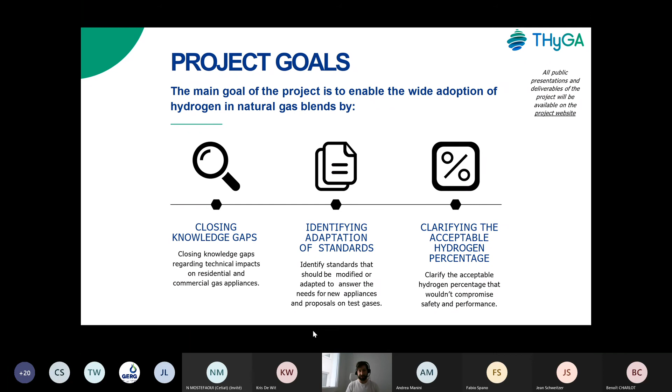So for example, all of you invited today, but also the general public, so that most data is available for the wider public. One important aspect of the THyGA project is that I think 80% of our deliverables are public, so will be available for download on the website. We are really there to help the stakeholders get a better understanding of what may be coming in the next years.

Work package 2 is over, it was done in 2020. It's about the status of gas utilization technologies - what is the state of knowledge today in literature, from past experimentation and past tests in laboratories, and how can we use that to create a test program and prioritize some tests of some appliances. The core of the testing will be done in work package 3, experimental work. Then work package 4 is about standardization and certification, and finally work package 5 is about recommendations for mitigation measures.

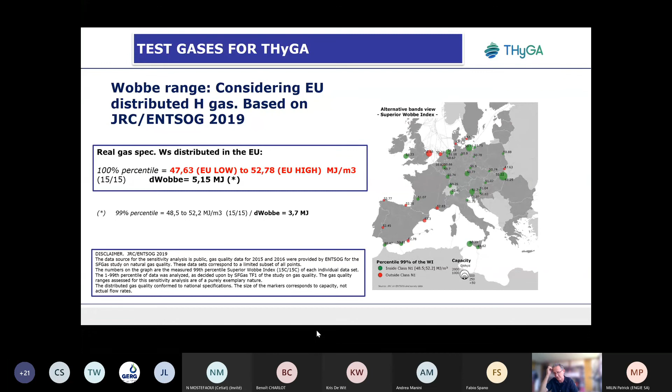So two other gases that we will use as extremes for designer or test gas. Alexander, can you go to the next one?

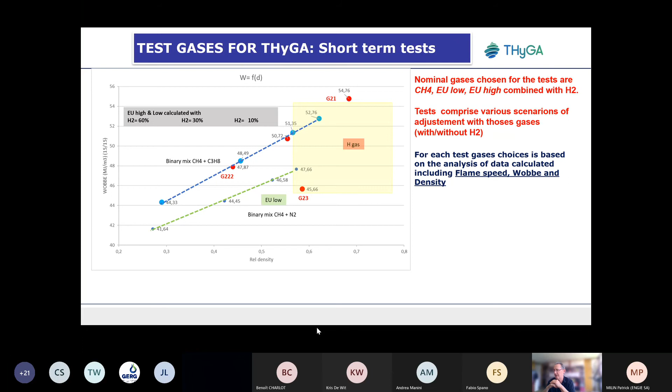Without going into detail, we have a number of tests designed according to the appliance, because for some appliances we can combine safety test, efficiency test and emission test. For others, the test must be separated because the procedure from the standard is different. But as much as possible, we have tried to make a program that brings the best value for the money.

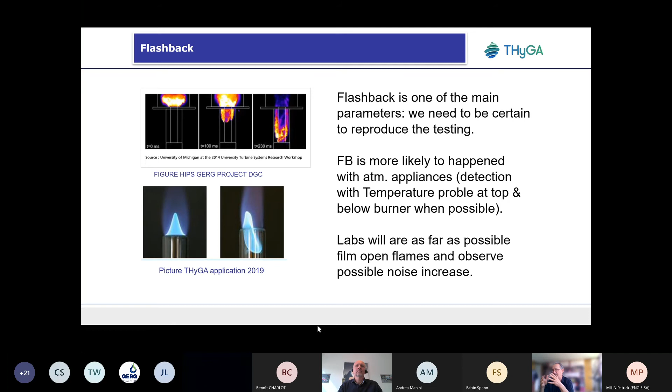Flashback is one of the things expected to happen when you inject hydrogen into natural gas. This is something where we have to harmonize the way we assess flashback, and it's not always easy. We have a lot of discussion about that, but we don't have time to look at the details, so I will go to the next slide.

We designed the testing program according to the highest difficulty for the appliance, to be certain to have the situation where the appliance will have some difficulties with hydrogen. But this will be different depending on the burner type, and this is something we take into account in the testing program.

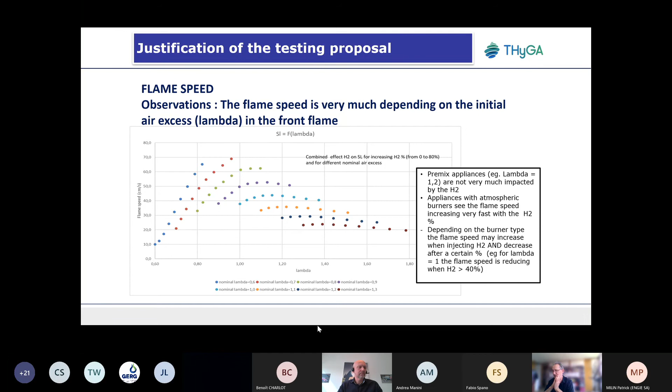One important point, which was also important in a previous project called GasQual that some of you know, is that adjustment gives some additional difficulty for the appliance and can possibly bring some safety issues. So we are testing appliances with different scenarios of adjustment.

Knowing that the appliance's air ratio is fixed with instruction of the manufacturer for O2 or CO2, depending on the manufacturer instruction, and then it is used with another gas, this is somewhere you might have some difficulties. We have tested this, with 4 different scenarios where we adjust with and without hydrogen at low level of Wobbe index and high level of Wobbe index, and then go to the other side. Once it is adjusted, we use the extreme other gases.

In the last slide, we'll have maybe just 1 minute to give you an example of results we have obtained so far. The first example is about a boiler, where we have an adjustment, what we call G here for the test. It is adjusted—one of the most difficult adjustments—because it is adjusted at EU low, the lower Wobbe index, with a scenario of 20% hydrogen. Then, once adjusted, we change the gas without touching anything on the appliance, go to EU high, and then inject hydrogen.

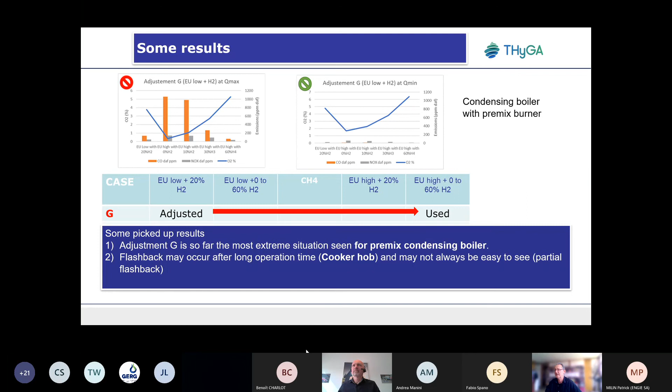I think this is maybe the last slide, if I remember well. Alexandra, maybe you can try the next one to see if, okay, this additional slide, I don't think we should go on that. Okay, thank you very much, Jean. I think those were some long 2 minutes, but I think it was worth it. No problem at all.

And I will speed up for what my presentation now is concerned. Because it is linked, it's a topic we are looking at today, but many of the questions will be addressed in further presentations, or part of the questions I raise. So maybe next slide, Alexandra.

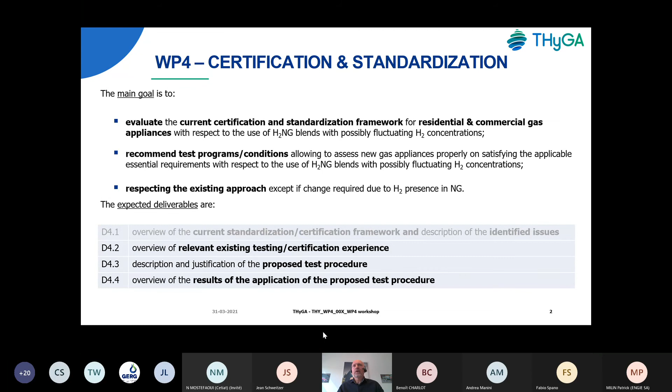Appropriate H2 concentration - to introduce it as soon as possible is also very important, taking into account that appliances are generally there for a long time. And then obviously, besides the GAR, other legislation like eco-design, etc., may also be important.

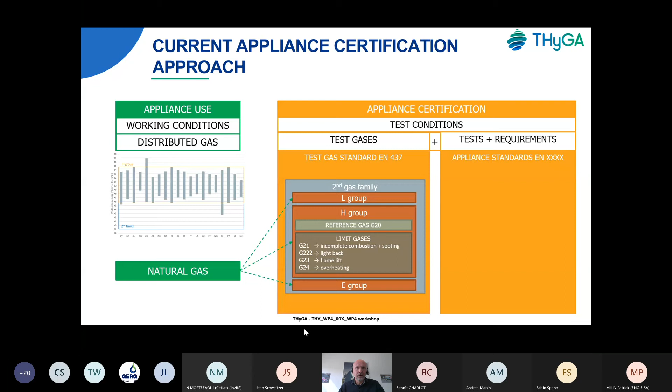There are different gas groups, and we are looking specifically at the H gas group here. There is a reference gas and limit gases that go along with that. Besides that, there are other gases that may be distributed, like LPG, a bit less town gas, but those are the other families of gases. And on the right side, you have the different types of requirements described in the appliance standards.

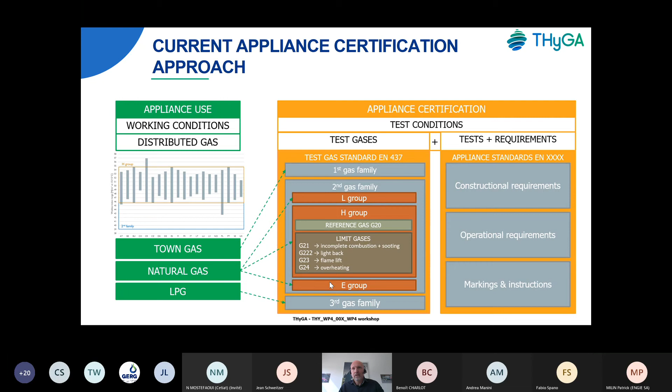Some considerations regarding the test gases - they are defined as set in EN 437. The gas family, as defined today in the standard, is a group of gaseous fuels with similar burning behavior linked together by a range of Wobbe indices.

But you could question that, as hydrogen is significantly different from methane, the main component of natural gas. And looking at the range of Wobbe indices, adding hydrogen in higher concentrations, you could end up with Wobbe indices lower than the lower limit of the current second family.

You have a number of gases in the table below, as defined in the current EN 437 standard - a reference gas, and the question is whether one reference gas is still the right thing, as it's used for most performance tests afterwards. Then you have different limit gases looking at one specific risk generally. There are also questions of whether you would need to change those.

For instance, the one on light back needs to be adapted to the hydrogen concentration we may look at, and maybe taking into account a worst perspective. I wouldn't call it the worst perspective, because the worst perspective is if you look at, for instance, a maximum of 20%, 30% - but is that what the appliance will be supplied with all the time? It could vary over time, and maybe go beyond the maximum value sometimes. The worst perspective would be 100% hydrogen if you end up at concentrations like this, but I think that's not the intention.

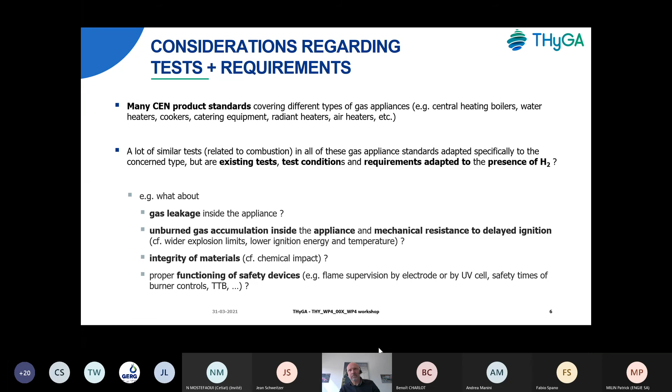So, for instance, we are looking at things that have also been mentioned, like gas leakage, maybe inside the appliance, unburned gas accumulation inside the appliance, mechanical resistance to delayed ignition, integrity of materials, and also - not to be forgotten, very important - the proper functioning of control and, even more, safety devices. It's quite fast, but I think many of those questions are also addressed in the further presentations.

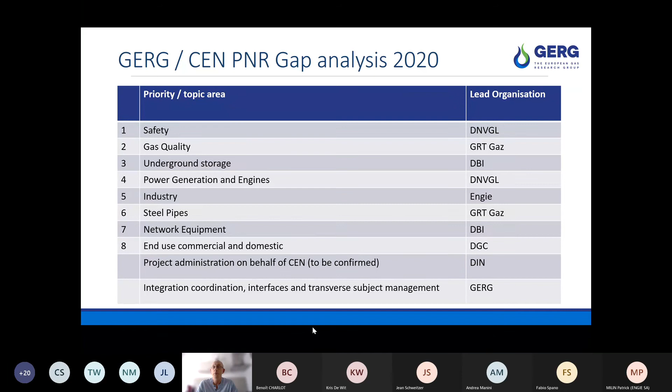In terms of today's meeting, Work Package 8 is the important one, or links most closely to the work in THyGA. We can move on to the next slide, Alexander. Let's just go over these. The timescale really is to complete this work this year.

We're still at the first stage of assessment. We had a major meeting yesterday, which brings us to virtually the end of the first stage of knowledge gathering. We're now moving into the stage of assessing the gaps in knowledge, and ultimately we'll be looking to do recommendations for future pre-normative research.

We would expect this would lead then into a number of research programs, which will lead to an improvement in the roadmap to standardization. Importantly, pre-normative research is about standardization. It's about certification to some extent, but standardization is the basis of this work.

As I say, it's moving very fast, and we are catching up in that the contracts were signed quite late by the Commission compared to the actual timescales, but we're moving very quickly, and we expect to come up with the first assessments within 2 to 3 months.

So having introduced it, hopefully in only about 2 minutes, I will hand back to John, who will tell you about Work Package 8.

Thank you very much. I think there is some echo. Maybe somebody has a mic.

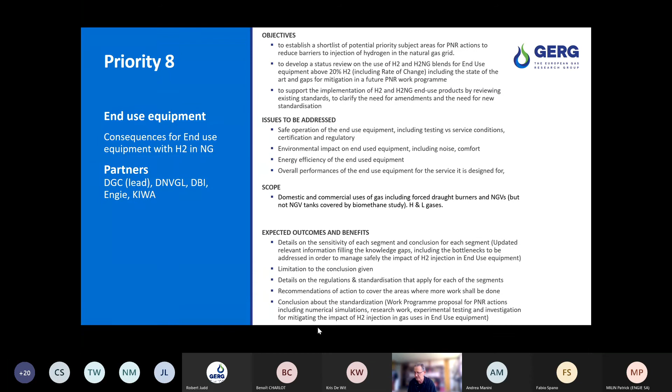Maybe I will go on the next slide, not to use too much time. So what are the activities at the moment? You have to know it's not a big project, so we have quite restricted funds to do the work. We cannot go too far, we have to stick to what we have in the literature and what we know, the expertise we have around the table. We have no room for testing, no room for whatever fancy investigation.

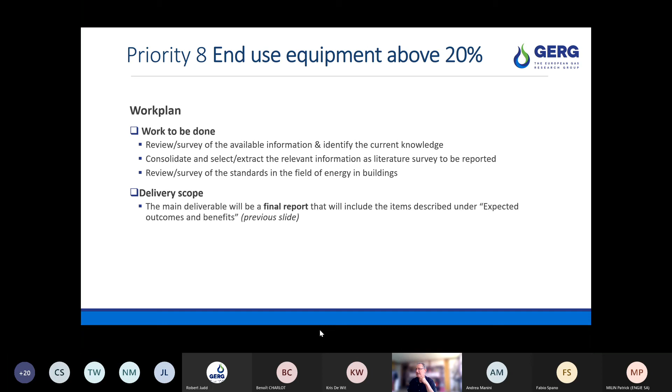So what we are doing at the moment, we have gathered -- this was done by our Robert, Alexandra, and GERG team -- collected something like several hundred, I think it's 900 references at the moment that are dealing with hydrogen. At the moment we have identified something like 240 references that are relevant for the WP8 for the end use. We are now going to work on the references and take the information that we need for the project. So maybe next slide again, Alexandra.

Maybe that's not very interesting, but just to say that we are a few laboratories here -- 6 laboratories or 6 partners that are doing the work, and we have distributed the work among the experts. Where we know they are strong on some areas, they were given, let's say, 2 specific points to work on. And as I mentioned, there is a lot of, I will not say overlap, but there are some common topics between the different priorities. There is also an important element to connect to the other groups that are working on, for example, safety or gas quality, which are things that are very relevant for us as well.

Maybe I will just go on to the next slide. So what we are going to do here is that we are gathering the expertise. We are starting to analyze the different references, and we will use a matrix -- I will show you -- to work and as a tool for putting the information together and analyzing it.

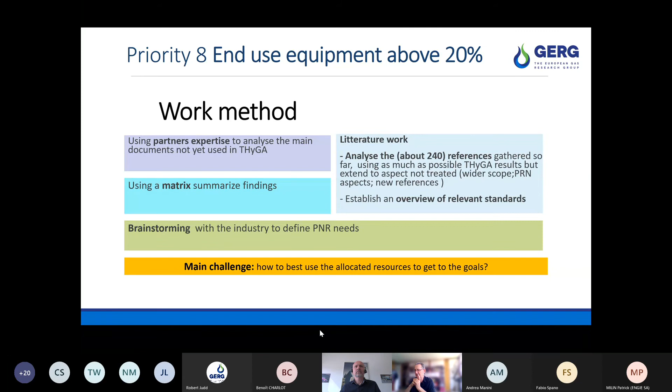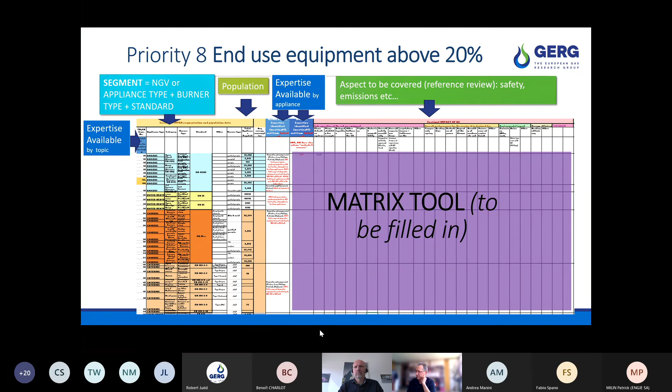Maybe I will just go to the next slide. I can just feel I don't have very much time. So in the different columns, we are looking especially at the impact of hydrogen on safety -- all the points on the table here, from flame detection system, flame stability, and so on. We are also looking at the overall performance for the service for which the appliance is designed, like, for example, the heating time for cookers, which is an important parameter. But we're also looking at environmental impact, from emission to noise and so on.

Let's go to the last slide. Okay, now, sorry, just back on the last slide -- those are so far the appliance standards that are concerned by our WP8, and we have identified yesterday a few more, so the list will be updated.

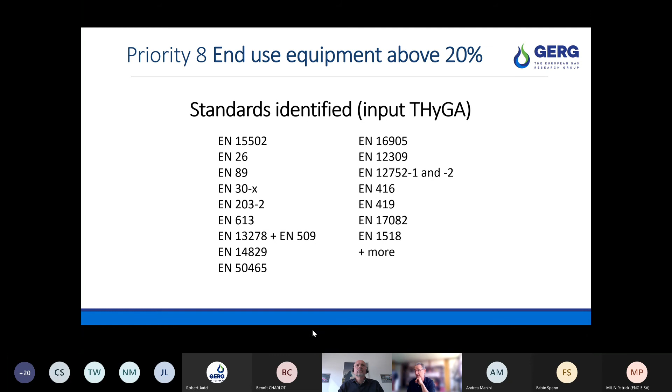I want to use a bit of time on the last slide here. This is what we are going to do next steps. When we have done the analysis with the method of the matrix that has been described shortly here, we are trying to identify what are the learnings about sensitivity to hydrogen for the different segments, and also what are the possible learnings about R&D needs in terms of prenormative research.

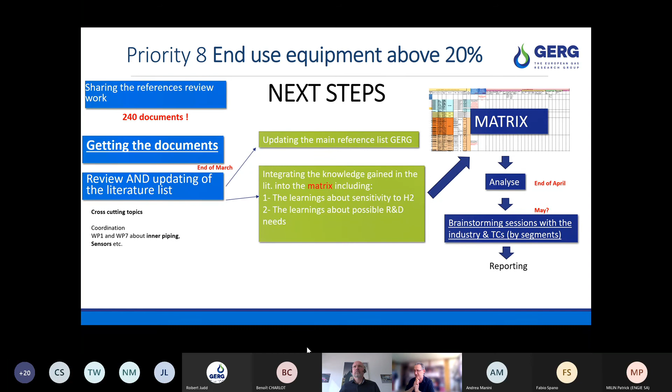And then we would like to make the analysis, and some brainstorming with what we call the industry—basically manufacturers, experts, and TC members. If you are interested to contribute, we'd be glad to hear from you. Hiltrud is gathering interest toward a table where different interests are mentioned, but if there are people outside the CEN group willing to help, we are interested as well. Thank you for your attention, and sorry again for taking too much time.

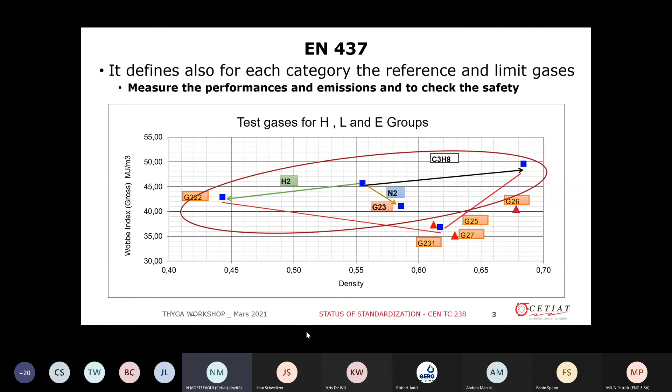This may have already been covered by Chris. The gases used for group H include G20, G21, G222, and G23. We also have another gas, G24, called the overheating limit gas, used by manufacturers—not for certification—to check the impact of high heat or heat fluctuation on the burner. We add propane to increase the heat and hydrogen to increase the flame speed, so the flame is mostly stabilized on the burner surface.

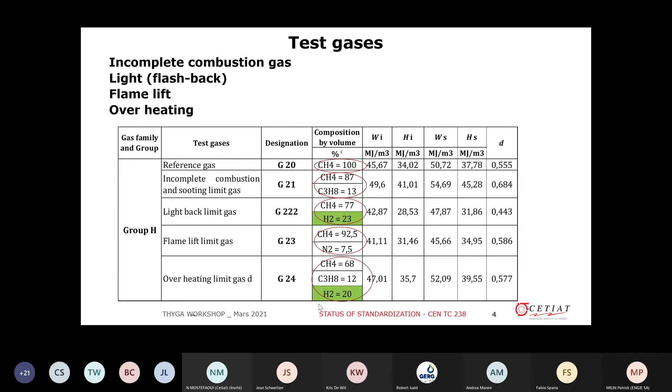This was already shown before, but just to emphasize: for manufactured gases, nitrogen is added to reduce flame speed and also to reduce flashback. Otherwise, if we only have methane and hydrogen without nitrogen, the flame speed will be very high, leading to a large influence on flashback.

Okay, what is the impact of hydrogen? As Jean said, and also Chris, the main problem is the flashback, because when we add hydrogen to the gas, we are going to increase the flame speed, as shown on the diagram presenting flame speed as a function of hydrogen content in the gas from 0 to 50%, for different excess airs or lambda.

Lambda is 1 plus excess air over 100. So for 20% excess air, we have 1.2 for lambda. As Chris also said, the impact of hydrogen is on flame stability, the flashback, because the flame speed will increase relatively compared to the gas without hydrogen. There's also an impact on performance and emissions depending on the quantity of hydrogen added to the gas.

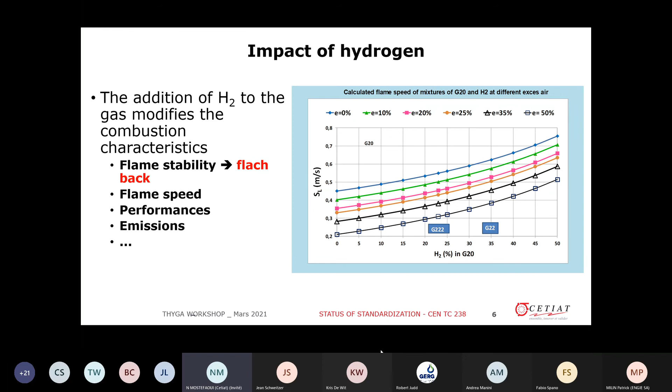So the impact of hydrogen is pushing most of the CEN-TCs to relook at the standards, to see what is the impact of hydrogen on performance and emissions, and adapt the standards accordingly.

So in TC238, we have EN437, which is actually under revision, and the inquiry was passed without big technical comments. The TC decided to publish it without formal vote, and maybe it will be published this year, the beginning of this semester. The TC took a decision in the last plenary in September to revise the standard in 2 steps.

The first step is to integrate into the standard mixtures of natural gas and hydrogen up to 20%. This will start as soon as the standard under publication is officially published, maybe at the beginning of next semester. As soon as the revision with hydrogen is finished, the version which will be published, I call it version 21 because we are going to start the work this year, maybe it will be published in 2022 or 23.

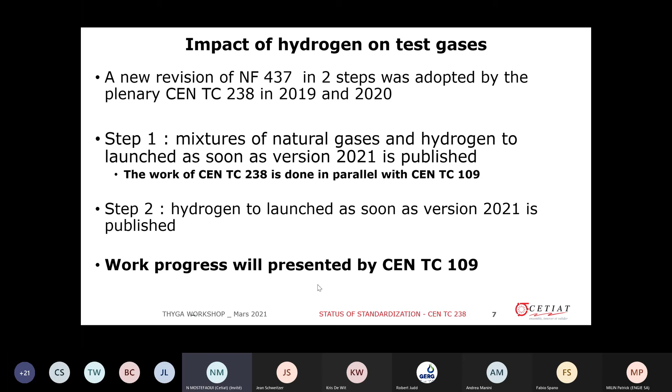We launch the revision for hydrogen to revise the standard. The details of the work done in parallel with CEN-TC 109 will be presented, I think, by Michel and Mindert. I think that's the last one, and I thank you.

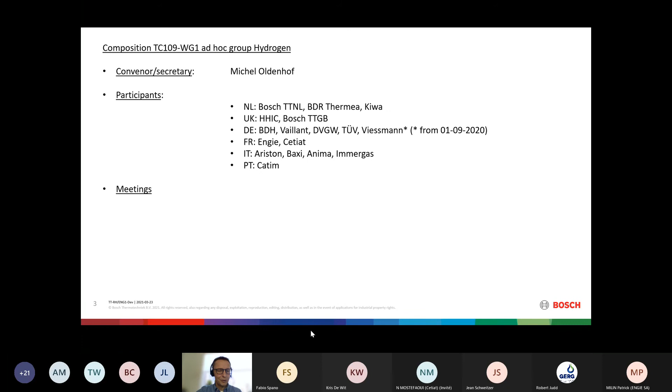We started February last year, and our next meeting—please press the button to see the overview of the meetings we had. Last meeting was in February, the next will be in May. Next to focusing on the job tickets, we also invite people for presentations. Stefan Carpentier frequently gives an update of the THyGA project. We get an update from the UK on HyDeploy, Hy4Heat, and also from Germany on the H2-20 project.

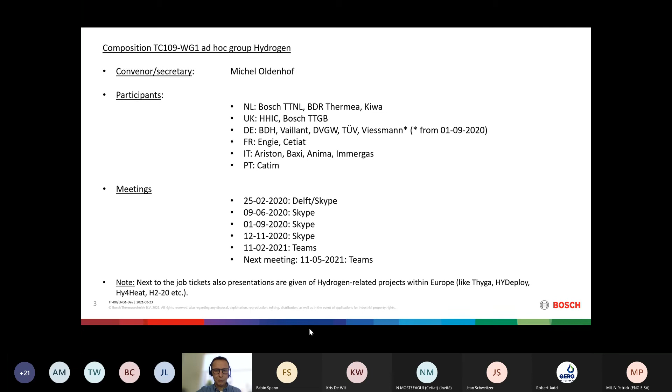So we really want to look also around us what is happening and make sure that we go in the right direction. Next slide, please.

So, achievement after 5 meetings: Job ticket 2 is now nearly finished. We have written a draft amendment for the EN 15502-2-1 for hydrogen natural gas appliances. We will have the final review of this in May, then we have our next meeting, and then the goal is to hand it over to TC109 Working Group 1 for creating a new work item. I hope that can start during the second half of this year.

The second one, as Noordin already talked about, is the proposal for the marking and the limit gases. That is also included in this amendment, and we hope to finish that one also in the next meeting.

In job ticket 3, that is to be started also in the next meeting. Hope we have time for that, otherwise it will be shifted. But we will look then also if that job ticket will be written as an amendment to the EN 15502-2-1 or as a separate part. We already identified by going through the standard that for 100% hydrogen, we definitely need to adapt more in the standard than just 20% blend.

Okay, and then the next slide is, I think, the most interesting one. This was mainly about the process. This slide is showing the adaptations we have done.

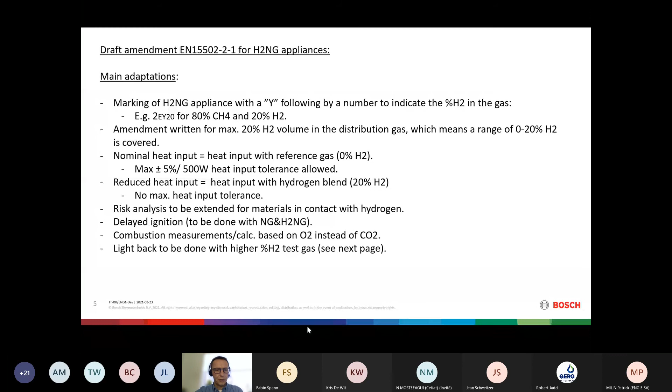And the light back needs to be done with a higher percentage of hydrogen in the test gas. We come to that on the next page. I think most important, and it is already mentioned in the earlier presentations, is the adjustment or maladjustment of the boiler. Because you can just adjust the boiler at 20% hydrogen or at 0, and that makes some difference. It was already explained in previous presentations, so I will not go further in detail, as we have limited time.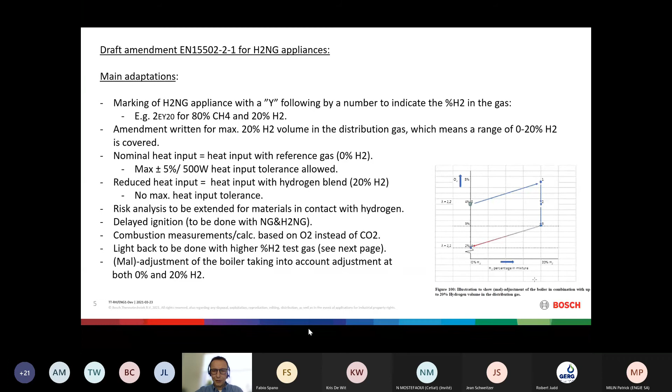Next one is about the limit gases. There I have to make clear that this is still a proposal, not finalized, but basically we have two proposals here. One we call the classic proposal, and it's in line with the current EN 437.

But instead for the light back gas, where we normally have G222, we use the test gas G22. It has 35% hydrogen. So we have the normal gas category, you have 2E, the reference gas is G20, and when you go then to 2EY20, basically all the gases remain the same except for the light back gas, where you have this higher amount of hydrogen.

And then we have the alternative. The alternative is basically in line with the proposal in the PAS 4444 in the UK for 100% hydrogen appliances.

There they propose to use a lambda variation of plus minus 10%, and that plus minus 10% lambda variation we can also use with 20% of hydrogen, or if you have a higher blend for 30% or 40% in the future, this approach can be used as well.

But it's still a proposal, and it's also still under discussion within our own ad hoc group. So there I have to clearly make this statement: it is a proposal, and it is of course still pre-normative work here. So I think this was the last slide.

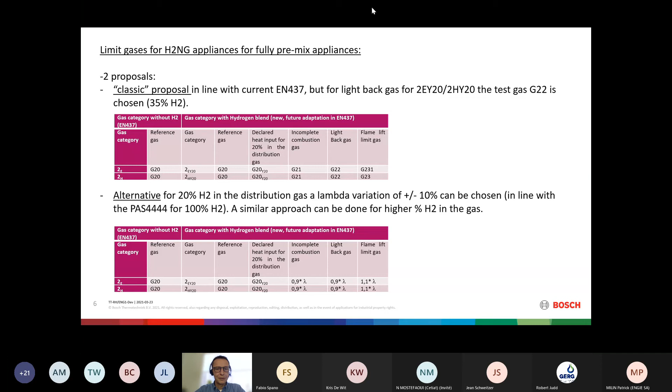Okay, thank you, Michel. That was clear, and I think a lot of work has been done there too. So it's interesting, and probably it goes indeed fast to understand or to follow everything for people that are not directly involved, I guess. But okay, unfortunately, we do not have the time to discuss it in detail.

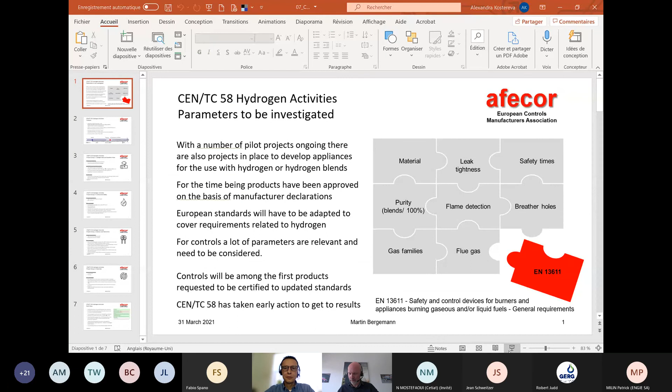Thank you very much. We will go to the last CEN presentation, on CEN TC 58, with Mr. Martin Bergemann chairing this TC. Martin, please. Yes, hello, my name is Martin Bergemann. I work with Siemens in Germany. We produce controls, and I'm also chairman of afecor, the European Controls Manufacturers Association.

I'm a member of TC58, but not chairing it. But we have taken an approach to do pre-normative work for TC58 because the standardization process might be slow, taking 3 years maybe, and we are under pressure since a lot of pilot projects have created a demand for, let's say, controls to be used with hydrogen.

For the gas carrying products, a hydrogen blend is not so much of a problem. It's more a subject of combustion processes. So we are focusing actually on use of 100% hydrogen, which poses different challenges. Some of the topics are listed on this sheet. I will not go into details here. I will more explain how we work and how we want to get to results.

So we are aiming at fast standardization processes. Next slide, please.

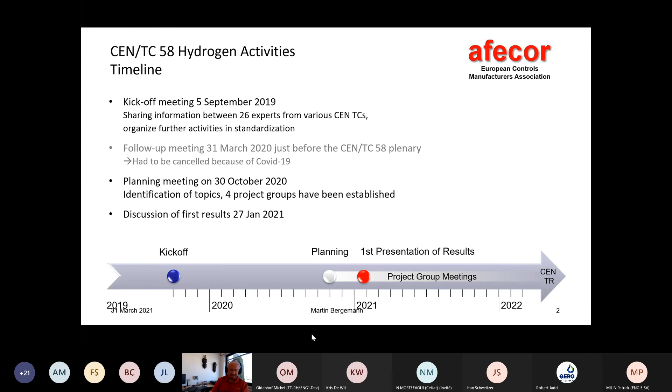Group 1 deals with leakage rate and breather holes. This becomes a topic if you go to 100% hydrogen. We looked at the lower explosion limit as the safety parameter to deal with, and we also looked at the minimum air exchange rate requirements, because if you have a permitted leakage inside a building, you also need to see that the concentration cannot build up—this is in relation to discussing safety.

We have done tests by several manufacturers to check the leakage with pure hydrogen and other gases to compare, and amazingly we found there is no all too significant difference. This indicates that for internal and external leakages, we have more a laminar flow model, and that indicates the limits we have in our standards today might be okay. There's also insignificant temperature dependence.

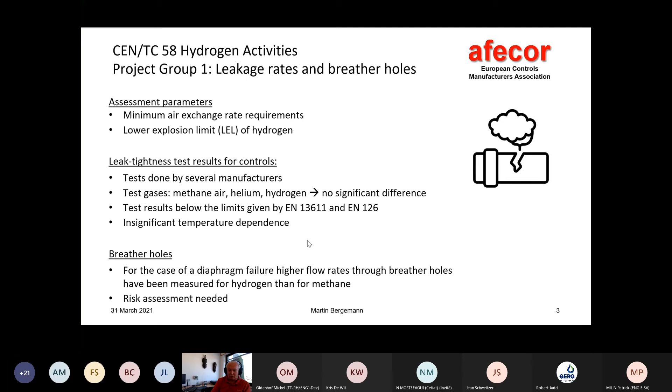Where we have a subject that is more asking for attention is breather holes. If we really assume a diaphragm failure, then the breather holes deliver higher rates of flow, which are significant and need to be addressed. Since here we don't have laminar flow but turbulent flow, with the breather hole diameter the flow increases quickly, and here we need a risk assessment. This will not go without changing requirements. Next slide, please.

Group 2 deals more with combustion safety, and this is actually some cooperation with TC131 forced draft burners. They work on the topic of accumulation of leakage rates. If you have several components in your installation that each deliver permissible leakage rates, you have to look at how it builds up if you have many of them.

Of course, you have the flashback subject and purging procedure. You have to look at products where you sometimes have air inside and sometimes hydrogen. What does that do? Do you get some dangerous mixture in those components, and what do you have to think about that? Then, what do you do if you have to replace certain parts and open up your system, like filter exchange, valve exchange, actuator exchange?

Another subject, more on the combustion side, is if you move towards 100% hydrogen, how do you detect incomplete combustion? Because there's no CO left, you have to find different methods to deal with that. And also there are certain factors compromising product lifetime if you have higher heat exposure.

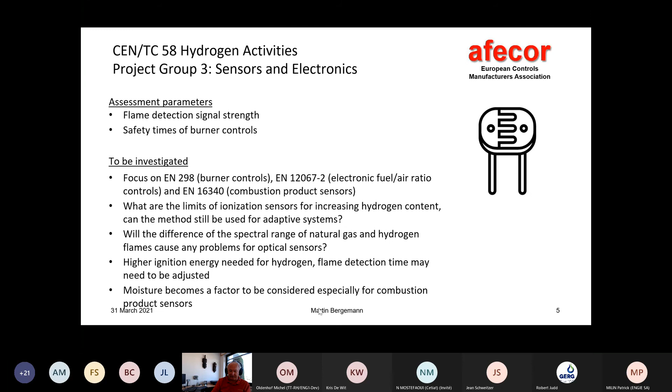The fourth group looks at materials under parameters like temperature and pressure. So far, we see that under the temperatures we use in our applications, temperature does not seem to be a factor. If it does, we would have to add the operating temperature in a certain classification scheme to the standard.

You can have high temperature, you can exclude them for temperatures below 178 degrees, but you may see some H2 embrittlement, and that's something we need to look into with more focus.

And also springs might actually have to be investigated separately to see how they behave, because springs are typically a failure exclusion in our assessments. Next slide, please.

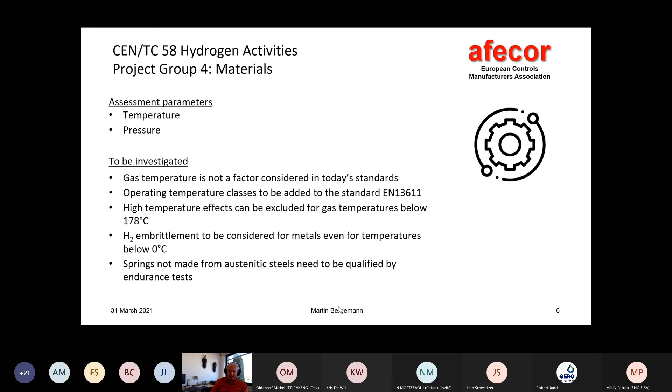So this is already my last slide. How does it go on? We have detailed discussions in the project group. The next one is tomorrow. There's a close sequence of events to really do the work in greater detail.

At the moment we have a draft EN 13611, which is our general safety standard, where already the parts that need to be addressed are marked up so that we can work through them step by step.

We compile all the investigation results that we are getting in a document, which should be made available within a year, because if you work in the standard, it takes longer, and we need this fast. So we have submitted a new work item proposal for a technical report, which should be this document I mentioned. This proposal has been submitted to CEN/TC 58 for decision.

The next plenary is already on April 9th, and we will then decide on that. We may have to establish a new working group for that, for formal reasons for the way CEN is working. And here's the name of the work item proposal.

It's supposed to provide guidance. A technical report is only a guidance document, it is not a standard, but it should provide input for the single working groups within TC 58 on what to do with the individual standards.

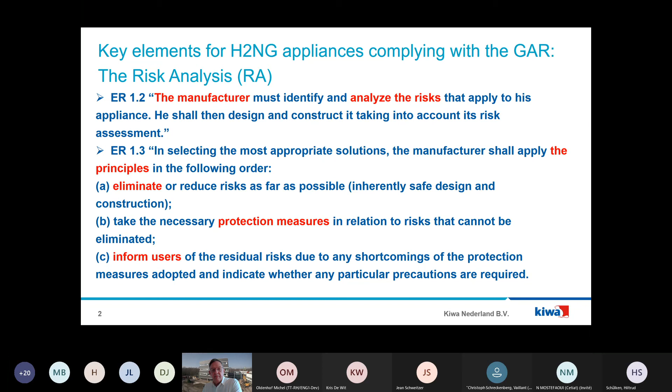Let's go to the next slide please. If you look into the requirements in the gas appliance regulation, I still quote essential requirements because that's the key point. Warning notices on the appliance and packaging, and in the installation instructions, must state the type of gas to be used and the appliance category. This is a legal requirement. As hydrogen to natural gas is not standardized yet, a manufacturer has to improvise. We'll come back to that later, but you have to make clear what gas your appliance is suitable for.

The second step is that you must provide instructions for installation and adjustment. That's the responsibility of the manufacturer, and whatever you write down must be safe. Then we get into more detailed essential requirements: stable ignition and stable combustion process, two ERs. Key issues there are light back, overheating, and incomplete combustion. And one must consider the instructions for adjustment when making assessment here, because adjusting is a key point and a key risk.

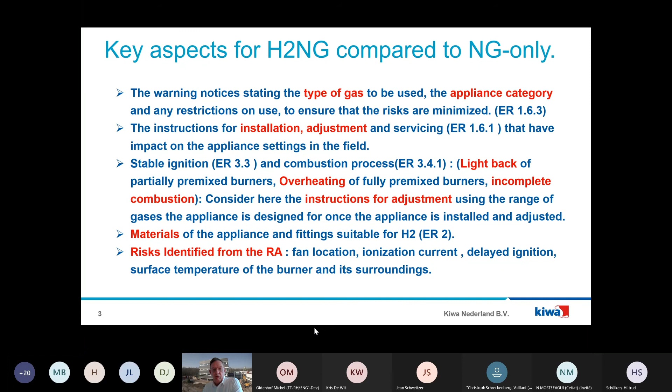Fourthly, to be honest, you have to look at the materials - they must be suitable for hydrogen. Others talked about it. And finally, there are some risks already identified by manufacturers who already have a certificate on their gas appliance: location of the fan, ionization current, delayed ignition, and surface temperatures of the burner and its surroundings. Those are key issues that we have to consider. Can we go to the next slide please?

For the type of gas, we have a problem because there are no standards yet. What was suggested to TC238 but not accepted, or not in the standard in the near future, is to at least make clear for what wobbe range the appliance is suitable and for what amount of hydrogen concentration the appliance is suitable. What we suggest as a notified body is to use two parameters, a Y and a Z.

Let's first go to the Y and then to the Z. The Y indicates the amount of hydrogen that can be added to the natural gas, the base natural gas. A Y20 would mean that you have 20% of hydrogen, and a Y30 you can calculate - that would mean that you have added 30%, and Y10 of course 10%.

The second thing is the Wobbe index variation of the base gas, the real natural gas, because natural gas does not contain any hydrogen - that would be unnatural. But if you add hydrogen to natural gas, the base Wobbe variation is a key issue because that will be relevant in the adjustment procedure of the appliance. What is suggested is to use Z, and the variation in megajoules per cubic meter multiplied by 10. So Z20 basically means a wobbe bandwidth of 2.0 megajoule per cubic meter at 1515.

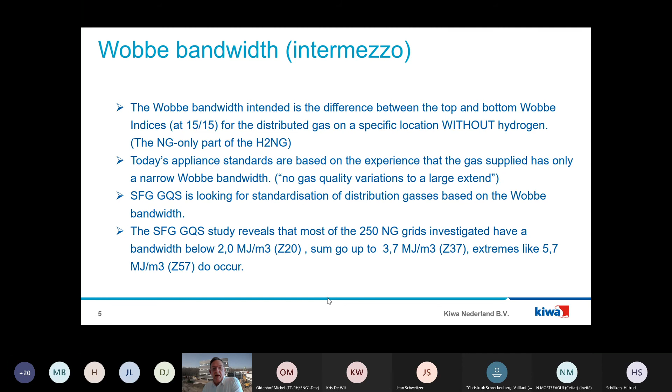Let's go to the next slide. So basically, these parameters could be used in the appliance category. We nowadays have the I2E that could become I2E YYZZ. If you add 20% of hydrogen and you have a bandwidth of 2 megajoule, it will be Y20 Z20. If you have a bandwidth of 3.7 megajoule, it will become Z37.

You can do the same thing for H-gas. And if your appliance is designed only for minor changes - I won't define what minor is - then you can leave out the Z, and then you get I2EY20 for 20%, I2EY30 for 30%. This indicates that you are only designed for a narrow range, and the narrow range is not specified. I tried to get TC109 to agree that the narrow range should be specified at 2.0 megajoule per cubic meter, but they're not jumping the fence yet. Let me say it like that.

The second thing you could do is use the Y to identify limit gases if they're used, like Michel already did. Can we go to the next slide?

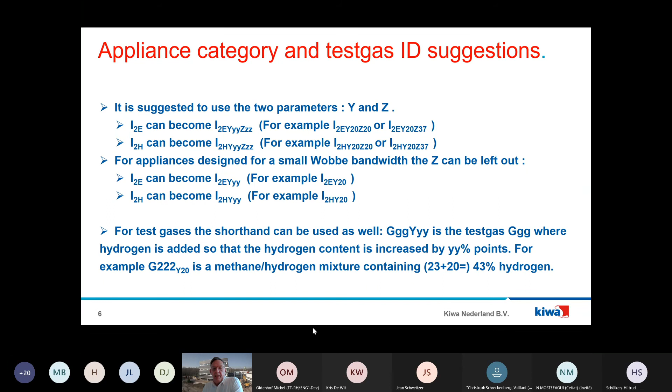Michel already mentioned that if you adjust appliances, you should adjust using the O2 content, and you have to consider whether the appliance is likely to be adjusted. There are a few reasons why they may be adjusted even if the installation instructions prohibit it, like in Belgium - national requirements on CO emissions, national requirements on flue losses - and people may be forced to choose to adjust the appliance or throw it away, and usually money prevails and they say, well, adjust it, that's okay. So we have to consider that as a manufacturer, how likely will it be that it will be adjusted?

A point I have to make is that adjustment instructions could be improved if the actual information on the Wobbe index of the base natural gas and the hydrogen component were available on a city-by-city basis for installers. This is not the case today, but if it were, proper adjustment could be made on site, avoiding improper adjustment. Let's go to the next slide.

And now we go to what adjustment means in the field. Basically what we're saying is, if you have to do adjustment on the appliance in the field, you have at least two extreme situations - let me say a high wobbe day or a low wobbe day with a lot of hydrogen. And on both days, adjustment could be made. So the test protocol must make sure that both settings will result in a safe appliance.

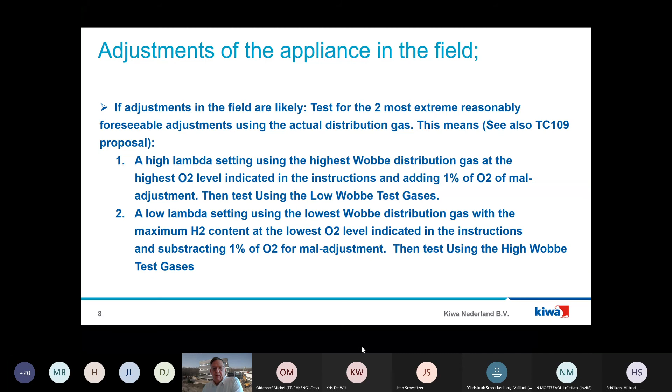Even if you set it at the high wobbe index, then you must test at a low wobbe index to make sure that it remains safe. And if you set it at a low wobbe index, you must test at a high wobbe index to make sure that it remains safe. So that's what has to be done by the appliance manufacturer. Let's go to the next slide, please.

One discussion we were having is, what safety margin do you need for the assessment? Basically what we have today is limit gases for natural gas, which does not contain any hydrogen. The safety margin accounts for risk of wear and tear, variations in climate conditions, and even some maladjustments. So for the appliance manufacturer who wants a certificate, he either has to provide evidence that his appliance has a similar safety margin, or he can provide evidence that the safety margin provided by the current test gases is over the top. If he can provide that evidence, we no longer need those test gases because they're above and beyond legal requirements, and they can be skipped. That would be a bit like opening Pandora's box, but it's a possibility the manufacturer has. If he doesn't want to do that, he has to make sure he has the safety margin.

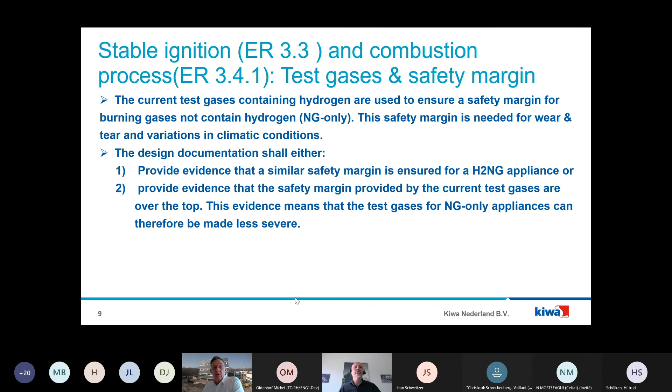Let's go to the next slide. Assuming you want to maintain the safety margin, using the letters I defined before, if you want to add 20% hydrogen to an appliance with limited variation in the Wobbe index, you could use G20Y20 as the second reference gas, and G222Y20 and G24Y20 as the additional lightback gas and additional overheating gas. That will give you the impression that you have more or less the safety margin.

If you want to go all the way and say, my appliance is able to deal with a Wobbe variation of the base gas without hydrogen of 5.7 megajoule, and on top of that add 20% hydrogen, you will have to make an assessment of how to test that. It's my belief this assessment will very much depend on the instructions with the appliance, the mixing method used, and the burning technology used. So it will be difficult to make a general purpose assessment there.

Go to the next slide please. Risks we identified in the risk analysis - we'll go quickly through them. The location of the fan, especially if the fan is in the gas-air mixture: the question is, what happens if it ignites? Will it fly 20 yards or will it only do a big poof? If you as a manufacturer have ensured that people are unlikely to be killed by it, then you have at least eliminated the risk. Flame supervision device, you mentioned it. Delayed ignition test - we would recommend doing a delayed ignition test anyway, regardless of the safety times, just to make sure there is no risk.

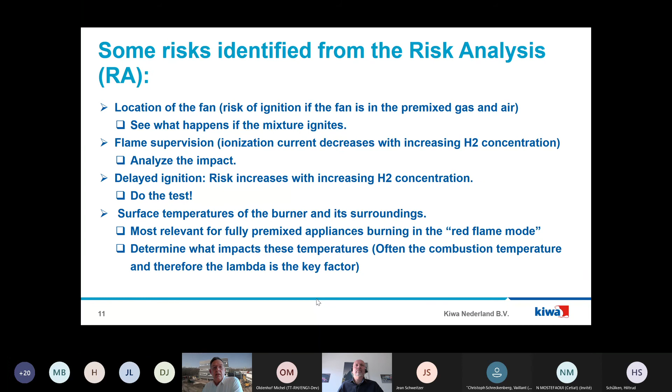Let's go to the next slide. That will be my first conclusion. To summarize it all up: instructions must be clear on the gases the appliance is designed for, and we have Y and Z as an option, but you can do it another way - there's no standard yet. Manufacturers must provide a risk assessment, and evidence that it's just as safe as a normal natural gas appliance. Key elements are as I mentioned, and I underline one because it's key: on-site adjustment of the appliance is not to be overlooked.

And now I go to lobbying mode. If you go to the really last slide...

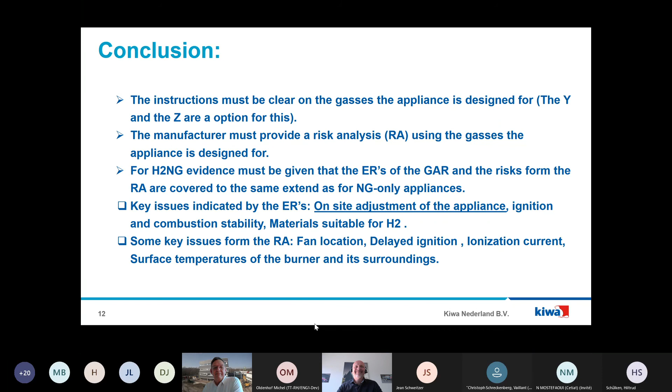What would help? If we want to introduce hydrogen to natural gas, it would be very helpful if there's accurate, actual information on the Wobbe index of the natural-gas-only gas and the amount of hydrogen in the gas, on a city by city basis, open to installers, so they can use that for setting the appliance. This is clearly not the case today, but if that is in place, it will be helpful. This may require national legislation on DSOs and TSOs to be adjusted to make sure they are responsible for doing so. But if that legislation is in place, the manufacturer may assume this information is available and can instruct the installer to use it when adjusting the appliance. So that would conclude my presentation.

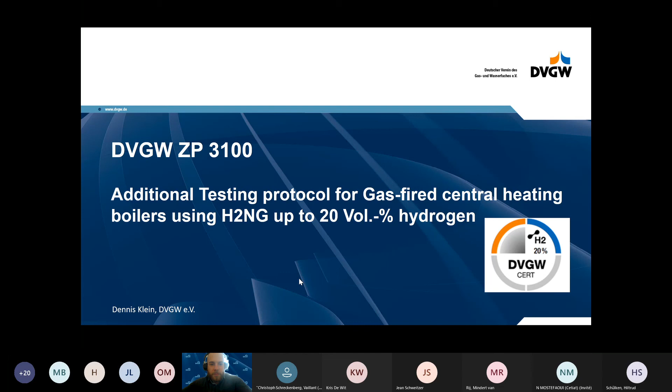And our sister or daughter company worked on a certification program. Please go slide back. Yes, that's called ZP 3100, and it's an additional testing protocol for gas-fired central heating boilers using hydrogen mixtures up to 20% hydrogen. Next slide.

Let's dive in. So first of all, why did we develop such a protocol? There was an increasing demand from manufacturers for the possibility to certify their appliances for the usage of 20% hydrogen mixture in natural gas. And there was no standard available. We're working on it, but in the meantime, there must be a solution to use these appliances.

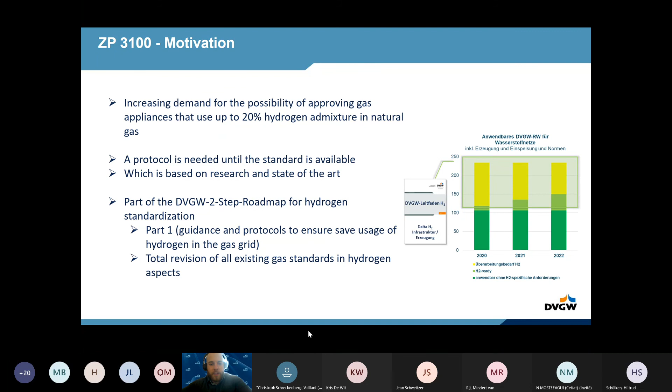Our protocol is based on research in the state of the art and is a living document, so we are constantly working on it, but for now it's finished. It's part of the DVGW strategy. We have a two-step roadmap to implement hydrogen in standardization: part 1 are guidance protocols to ensure that you can use everything in a safe way, and part 2 is the total revision of all existing gas standards that can then be used for hydrogen and hydrogen admixtures. Next slide.

Thank you. So the ZP 3100 is a testing protocol based on EN 15502-2-1. It's an addition, so you can't use it on its own, and it only explains the additional tests which are affected by hydrogen. There are also some new reference gases and test gases provided, which were also explained by Michel before - I'll come to this part later. And one additional thing you need are components, parts, and materials that need a declaration from the manufacturer that they are suitable for use with hydrogen or hydrogen mixtures.

The structure of the certification program is a big table which, on the first side, tells you which clause in EN 15502-2-1 is changed. It tells you what the new requirement is for up to 20% hydrogen, and how the test conditions differ. Then there are some comments if there's something special you need to consider, and on the last part, which test gas you have to use for the new or additional test. Next slide.

The protocol was developed by our German experts from the testing laboratories, some manufacturers, and notified bodies, and it included research and testing from the aforementioned experts. It was used to support the amendment of hydrogen for EN 15502-2-1, so as you can see from Michel's presentation, there are not many differences. There are, of course, some differences which are in the proposals, but we try to bring all our knowledge and gained expertise in this topic into the standardization.

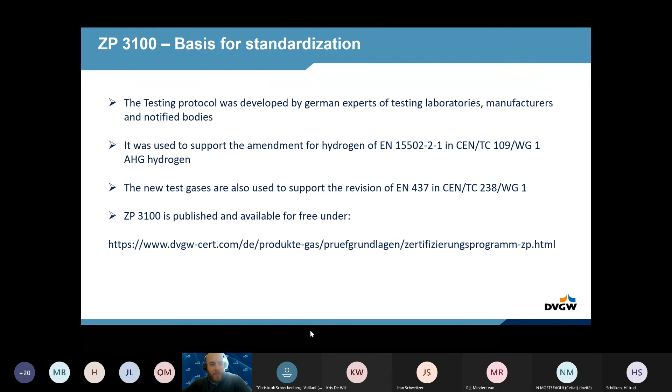We also bring the newly gained knowledge into the revision of EN 437, for the new test gases. And the ZP 3100 is already published - it was published last year in October, I think - and is available for free under the link provided. If you want to know more, I guess you download it, it's free. And if you have something to change or some questions, just ask us and we will try to answer. Next slide.

As next steps, we are also developing test protocols for new appliances that can use up to 20% hydrogen, in this case for fan burners. There's a working group working on it. Also, there's a new test protocol we're developing with experts for the use of 100% hydrogen in boilers, also based on EN 15502-2-1.

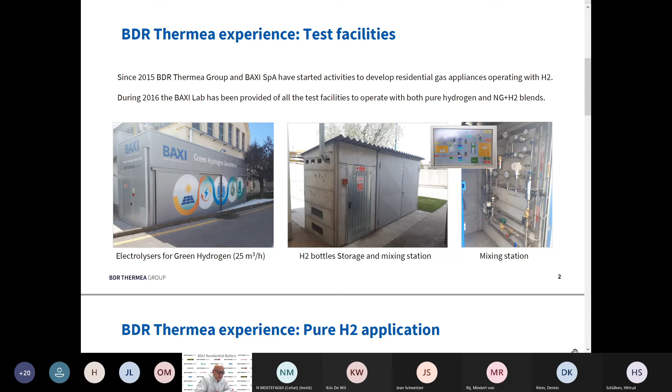The first boiler working with pure hydrogen was approved for field test at the beginning of 2019. It was installed in the Netherlands in June 2019, and it is still working today. Other boilers are working in the UK for the HY4Heat project, also in the Netherlands, and very soon will be installed in France and Germany.

Please, Alexandra. Okay, so as we know, hydrogen is a gas very different compared to natural gas, with features like high flammability range, low ignition energy, low density, high laminar burning velocity, high heat of combustion, and high detonation sensitivity and pressure rise, which can represent some risk.

So the H2 boiler should prevent any explosion outside the combustion chamber because of gas leakage, any ignition of the gas/air mixture before the burner, and any flashback, also in case there is a wrong lambda.

So the new European standard to be defined for this type of boiler should consider all these risks, and in our opinion PAS 4444 is a good starting point for the assessment.

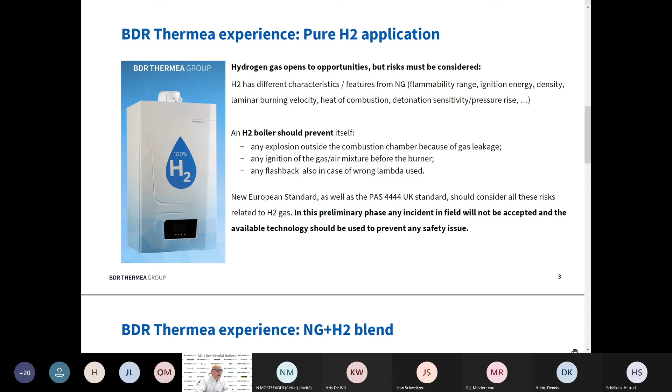In this preliminary phase, an incident in the field will not be accepted, and in our opinion the available technology should be used to prevent any safety risk. Please go on.

The story is different for natural gas plus hydrogen blends, because this is not new in our business. Gas boilers operated with town gas for many years in the past in several countries in Europe and also China, and most gas fittings are already suitable to operate with natural gas plus hydrogen, most of these components already approved today for the first gas family, G110, which has 50% hydrogen.

In Europe, the use of hydrogen in the natural gas grid is already authorized in some countries for low percentages of hydrogen. The main concern we see connected with the use of hydrogen in the natural gas grid is the fluctuation of the hydrogen volume in the blend.

Our recommendation is to limit the maximum amount of hydrogen to 20%, because we need to consider the risk of wrong setting in the field by service people, especially for fully premixed boilers. It's possible to set the gas valve in the field when the gas has a low Wobbe index, so the percentage of hydrogen is maximum, and afterward the boiler can operate with natural gas where the Wobbe index is higher. In this condition, the boiler works in overload, and the CO and burner temperature increase.

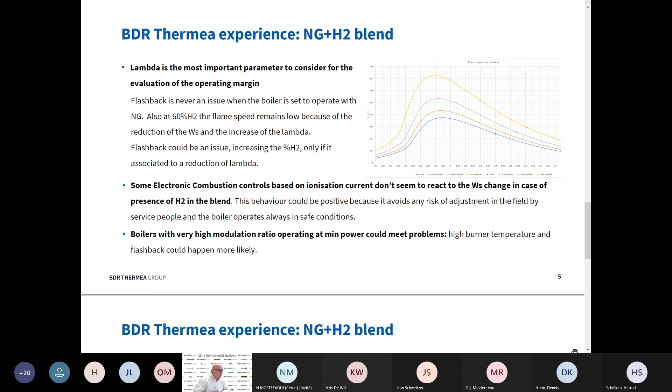Okay, so now we have here some consideration as per THyGA request for this meeting. In this moment, Baxi is directly participating in several working groups connected with hydrogen, like THyGA, Hy4heat for UK, TC109 ad hoc working group for hydrogen, Assotermica Green Gas Group, that is in charge of developing a test protocol for manufacturers for the evaluation of boilers already in the field working with a blend of natural gas plus 20% hydrogen. Also, the UNI mirror group that in this moment is in charge of developing a test protocol for the approval, for the certification, of boilers that can operate in the field with 20% hydrogen.

And also, we have a relation, of course, with the notified body that assists us on the certification of Baxi products already on the market with 20% hydrogen as blend.

So the risk associated with the use of natural gas plus hydrogen, as described in these slides, is not, in our opinion, a blocking point for the introduction of hydrogen into the natural gas grid. The use of a limit gas to verify the operating margin for flashback, we spoke before about G22 as defined per TC109, in case the maximum percentage of hydrogen is 20%, and this is consistent with the approach used today with the EN 15502 standard.

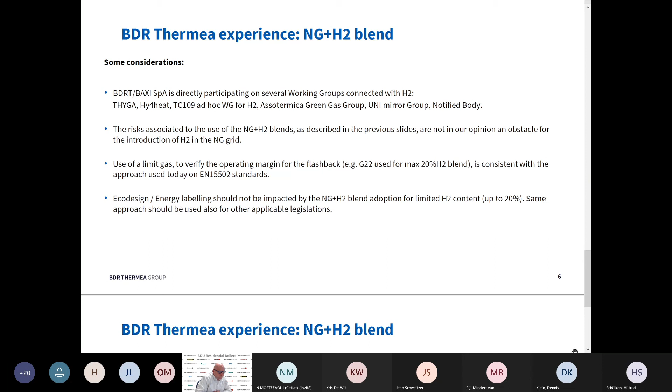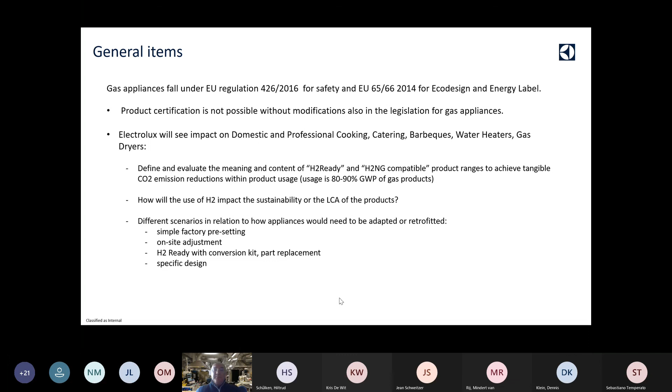We have to remember our components for gas products are not really controlled with an air-gas regulation. We have a fixed geometry - not only the gas burner, but also the injector and the gas valve. So we could need replacement of some of these parts if the increase in the percentage of hydrogen can have an impact, up to requiring a real specific design for higher hydrogen percentage.

About the hydrogen blends, there is a lot of discussion also in Italy. We have a new government since a few months, and there is also a new ecological transition ministry. This ministry has a very strong target of improving our innovation on energy and ecological transition. We are discussing hydrogen gas and also nuclear energy management as a new stream of development and innovation.

There's also a lot of money available now in what we call the recovery fund to recover from the current crisis that we are facing due to the virus. There is a lot of activity trying to find some guidelines for the usage of hydrogen, but there are still a lot of doubts about the infrastructure, production, and also transport and distribution of hydrogen. The situation is still not clear, and I think it's a little bit fragmented in Italy.

Our question now is, other than what would be the percentage in Italy, is there any potential issue with different national approaches to this type of percentage that can create confusion between the percentage variation country by country? This can impact the manufacturer, because if we have to state a different type of gas country by country - what Mindert said before, for certification of appliances - it can really multiply, even within Italy, within Europe.

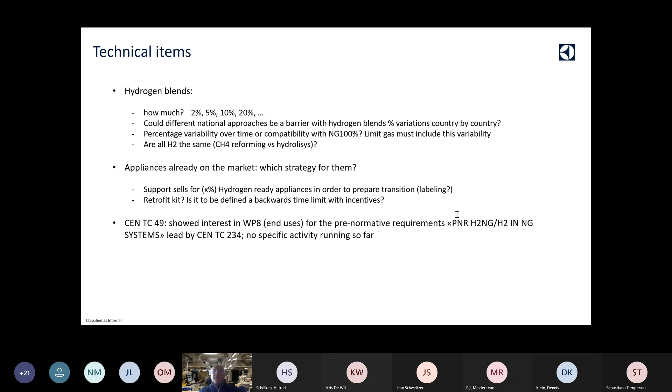This is my last slide. Again, certification, homologation, or even backward compatibility could make a difference for Electrolux in the business model we have to use for adapting appliances. If there is uncertainty about the strategy for introducing hydrogen into the main pipeline, this could lead consumers toward electric appliances. So we should be very good at informing the end user that there are no potential risks, no problems for them, and that they can use the appliances as normal, as they did before.

Another point is about supplier competence and component readiness. We as manufacturers are working on the subject, but what about the suppliers? The supplier base doesn't come only from the European area, where this will probably be an incentive for suppliers to work on the subject, but it's a global supply chain. So how can we be sure that our suppliers are working with us to prepare the components and parts for the introduction of hydrogen? We already discussed component readiness for hydrogen versus town gas with Martin earlier in this meeting.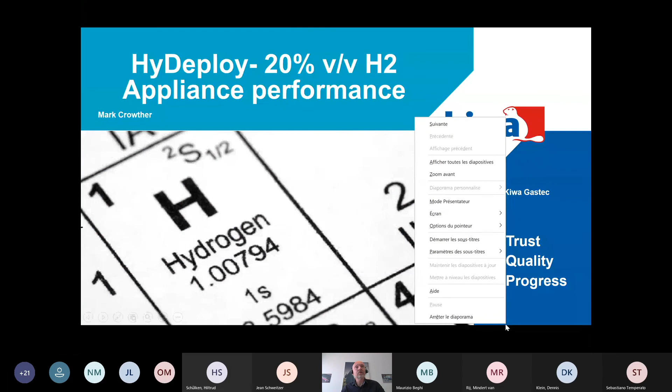Please, Mark. Good afternoon, ladies and gentlemen. This is Mark Crowther from Kiwa Gastec, based in Cheltenham, England. Very pleased to be with you this afternoon, and this is a good news story from start to finish. I'll move on. This project, next please.

This paper is based upon a much more formal academic paper that was given in Australia, which covers all the work that we've done. I'm giving due reference to the Health and Safety Executive and to IGEM, with whom we co-wrote the paper.

These are the test gases that we used, which I won't go through in detail, but are very similar to ones you've all seen before. You can see the Wobbe numbers cover the range expected, and the constituents cover the expected range. The client was Cadent Gas Company, a big gas GDNO here in the UK covering most of the Midlands, and for a variety of reasons going back to history, they decided 20% was the right figure, which is what the R&D is focused around.

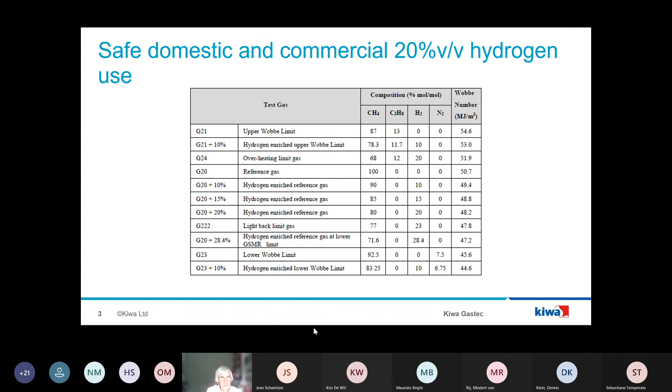It's quite important to note the actual range of the distributed Wobbe number, because with the top end of the Wobbe number currently at 51.5, by the time you're getting down to around 47, which is the limit, manufacturers are already taking calls about poor hot water quality, especially from people taking showers. If, as you can see, the addition of hydrogen brings the Wobbe number down even lower to something nearer 46, there are implications in terms of customer satisfaction.

So this was quite a limited program of work, but it gave us a good feel for things. We tested 8 products, ranging from hobs through to gas fires, through to boilers, with all kinds of partial and fully pre-mixed burners. As you can see, a couple of combi boilers at the bottom there.

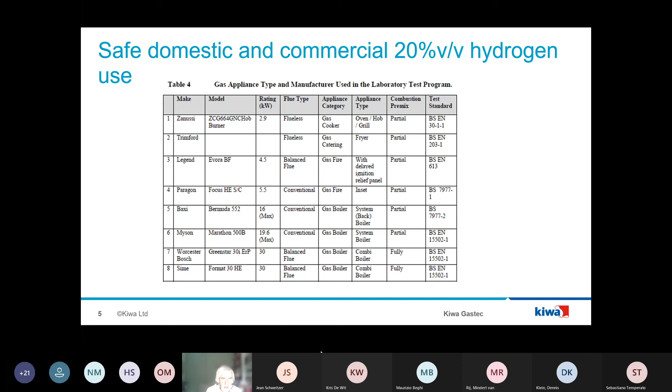There was an old BBU unit, which is very old, even by English standards—probably a 40-year-old boiler. There's a system boiler there, and there are some ordinary gas fires.

Although the typing here is small, what we basically found, just like the rest of the THyGA project will have done, is that we don't see any particular problems with any of those appliances when they've been left at their original design point, where they are adjustable, which is essentially for G20.

There was a question mark over one of the ODS sensors, which did perform fairly poorly, but that's probably because the hydrogen stabilized the flame on the pilot light. But really, from a risk assessment point of view, CO incidents are very rare in the UK. They're mostly related, in the old days, to soot falls, birds, and malfunctioning boilers. So really, it's something that we've managed to convince the health and safety authorities on a risk basis, and we can carry on forward.

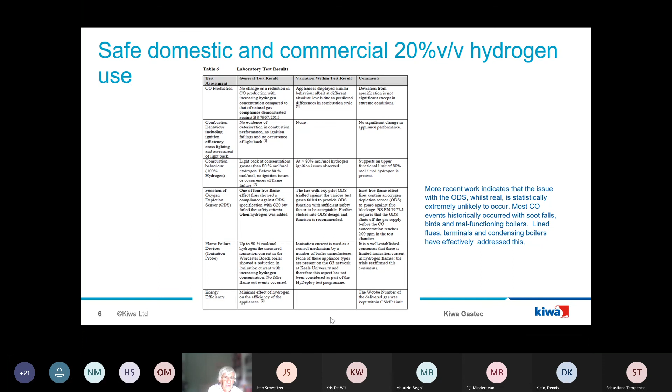This is the more interesting bit of the work, where people were asking earlier about whether we'd had second-hand kit into the lab. No—what we did was take one of our Kiwa bottle wagons, which is a flatbed truck on the back of which we mount bottles of appropriate test gas.

We take that in front of a house, or in front of a student block or a cafe, and we connect that cafe up to those gas bottles outside, and we test them.

We test in-situ performance, and we tested 199 appliances over a period of about 8 weeks, involving appliances in a whole range of locations, from flats to semi-detached houses, big detached houses, students' halls of residence, and other non-residential locations. Keele University is a large open campus university with its own independent gas supply, which is why it's convenient to do test work on that site.

The gases we used were G20 reference gas, then G24, which contains 20% hydrogen, and a test gas we made up with 28.4% hydrogen—because that's the maximum amount of hydrogen you can add to G20 without going below the GSMR limits.

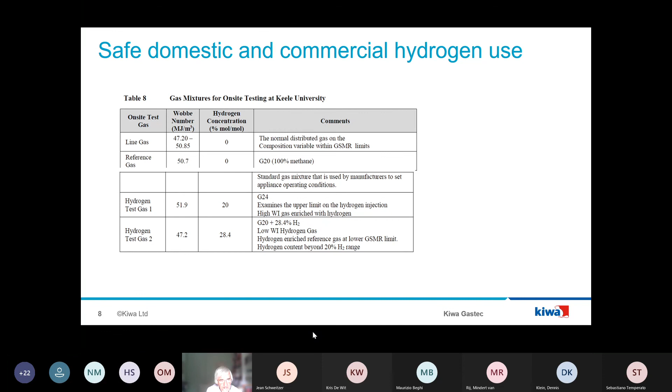Again, the results were extremely encouraging. This is out of 199 appliances—just a snapshot of the results. We found, for instance, that 38 out of 91 properties had correct CO alarms. They had the correct smoke alarms where necessary. The fluing was good, and the combustion behavior was all good, as you might expect with the second test gas.

With the first test gas, which has a slightly higher Wobbe number—that's your G24 with propane—the CO content went up a little bit. With the second test gas, with a lower Wobbe index, the CO levels all fell. The combustion performance was generally as expected, although the gas input did fall, obviously, with the higher hydrogen test gas.

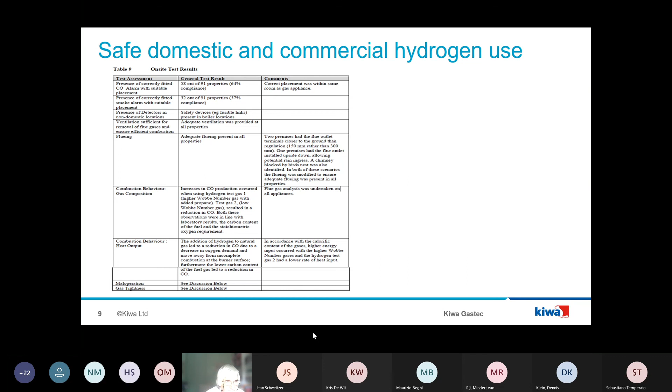Now, remember we tested 199 appliances. In a sense this is a little bit irrelevant to the THyGA project, but it explains that there were just two locations out of those where we found maloperation. One was a build-up of grease in a cooking facility, and the other was a boiler in a residential property. But let us stress, there would have been no difference to the outturn risk whether or not gas with added hydrogen had been distributed or not.

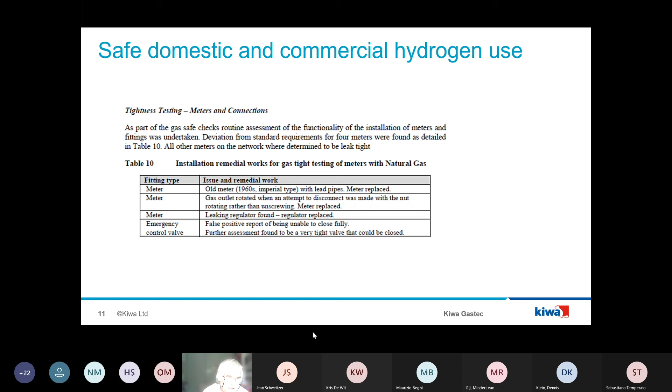Again, we did some gas tightness testing, and we found there was a very old meter there with some lead pipe connections which were replaced. There were some other minor defects, but again, none of these would have materially affected the risk posed by the gas installation when we made the change from natural gas to natural gas plus 20% hydrogen.

This is tightness testing of the actual downstream networks themselves. We did find a domestic property with a small leak on the hob, but again, nothing material would have arisen. In the Science and Learning Centre, there was a small leak on a gas governor, and in the sports hall, another leak. But really, these are not material, and I only report them because it's important that, for 199 real appliances, these are the real defects we observed, and the effect of hydrogen on none of them would have been material.

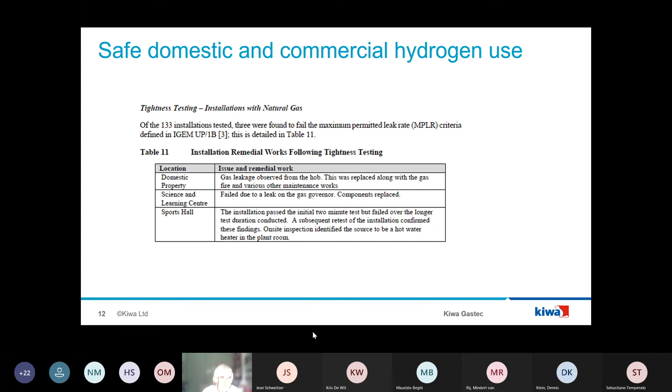Just a final point about the variability of gas, particularly in the UK, where some gas companies are pushing to have a base Wobbe index range of 6. By the time you have that and then start adding 20% hydrogen, we really think it's important for us to publish fairly accurate real-time values of Wobbe index and distributed hydrogen, because without that information it's going to be quite difficult on some existing appliances, particularly the larger commercial boilers, as used in some big student blocks and things.

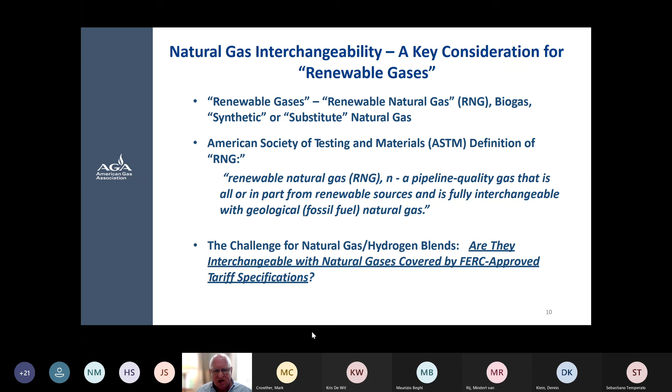And so this is an aspect that I really am involved with from the technical side as well as up into the regulatory side. We have to deal with these things simultaneously. Go on to the next slide, which I believe is slide 9. And I thank you, Alexander, for getting through this.

Yeah, just get into the testing that we did perform, and we are very far behind what the THyGA projects are involved in.

When we started off, this was a project initiated by AGA to get the manufacturers involved early, recognizing that some AGA member utilities had already made commitments to put hydrogen into the gases. We needed to do an exploratory testing program without preconceived hypotheses on what would actually happen. We had technical ideas and background from European experience, but wanted to follow the Z21/Z83 standards that appliance manufacturers are familiar with, and evaluate operations for a number of tests in terms of combustion safety and other operability against those standards when testing with hydrogen in the fuel gas.

Our tests were based on mixes of methane and hydrogen because we wanted to make sure we didn't have variability from natural gas components coming into our testing program. The testing program was administered by the Standards Secretariat Research Group, CSA Group, with the Air Conditioning, Heating, and Refrigeration Institute as co-sponsor, as well as AGA.

And the testing has been completed. We got the test complete, the report done. We're now working on finalizing the report from CSA Group, which should be published in the next month. Okay, next slide please.

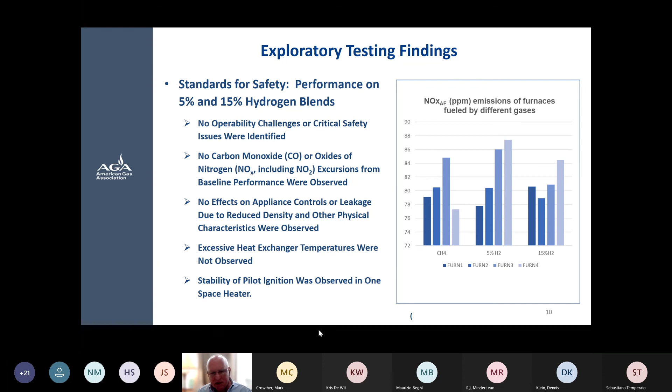Next slide please. Okay, in terms of what we took out of the exploratory testing going forward, we felt it was necessary for us to go back and take a look at real gases, not just methane blends.

This goes to the issue that the U.S. has never been - and this goes back over 30 years - the American standard scheme has never been around limit gases. There was a decision made quite deliberately in the 1980s to not revise the testing of appliances based on limit gases, but instead retain a system of test gases around which performance is evaluated. You can make an argument that the 8 test gases used in the U.S. system represent limit gases collectively.

However, those test gases are not all applied uniformly for all appliance behaviors, so it's not really a clear correspondence to what's done in Europe in terms of limit gases. But we essentially want to look at combustion behavior in particular in performance under the standards for safety, and we need some consensus over what is a representative gas in the U.S. With fracked gas and other sources coming into the system, there's an increasing question on what is a typical or average natural gas in the U.S. gas system - very hard to come to consensus on that. And then how to implement that consensus on what gases should be used for blends, appliance testing, and certification. I'll talk about that at the end of the presentation.

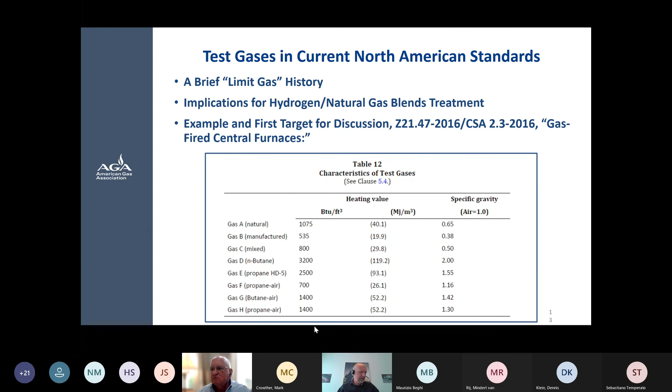Okay Ted, thank you very much for this presentation. Interesting to see, because yeah, I have some experience myself, although it dates back easily 20 years ago with testing also in the United States and Canada.

From what I remember, as far as test gases are concerned, it is significantly different, and the approach is interesting. I think it interests me, but I think also the project members would get a little bit deeper into that. But okay, not today. So thank you very much.

I didn't know either that there were also these cross-border gas quality issues between states. We have a lot of experience on that in Europe, as you probably know. Maybe we are not the best ones to look at, although we made significant progress in the meanwhile, but it took quite a while, also easily two decades.

Okay, I think that brings us indeed to the questions. So if there are any to Ted or the previous speakers after the break, please. But maybe I want to give priority to Jean and to Dennis, who also had questions before and who I asked not to ask their question at that moment. So Jean, Dennis, do you still have your question or your remark? Yes, please. Thank you, Kris.